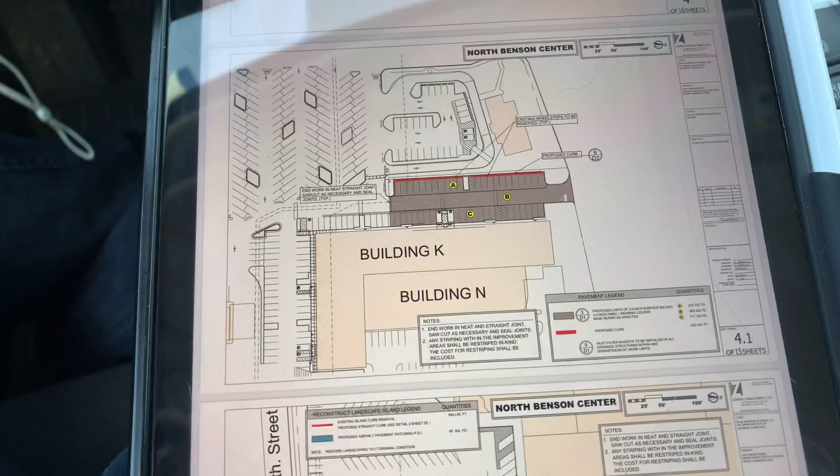This scope of work has dramatically been reduced. So you're going to have to create a revision 1 spreadsheet for asphalt and one for concrete. The striping is going to change, and that traffic curbing signage is going to change as well.

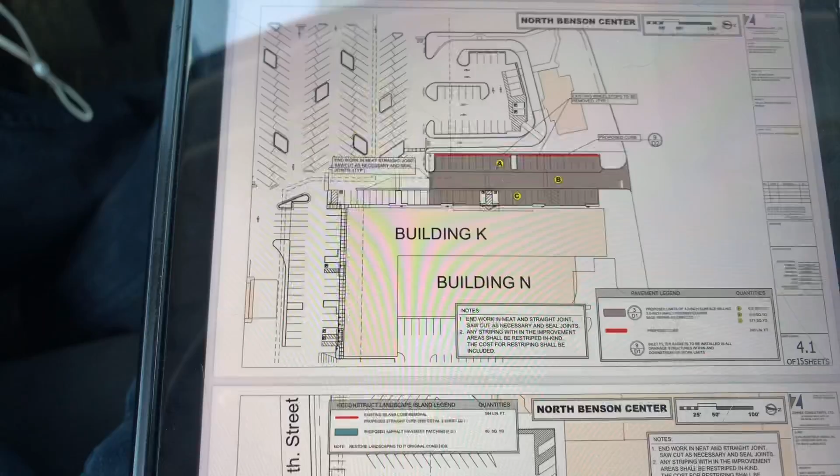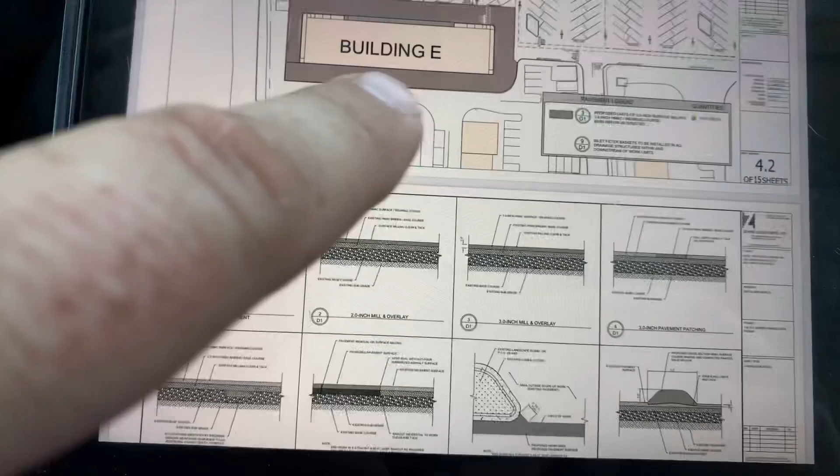All right, Jamie, so let's start off with the 3-inch milling. There's 2 different locations that I'm going to give you quantities for. One of them is at Building K, which is staying the same as before. But now instead of doing this whole area in front of Fred Meyer, we're only going to do this area right here. There's hardly any striping to have to do now because we're not striping any of this stuff back.

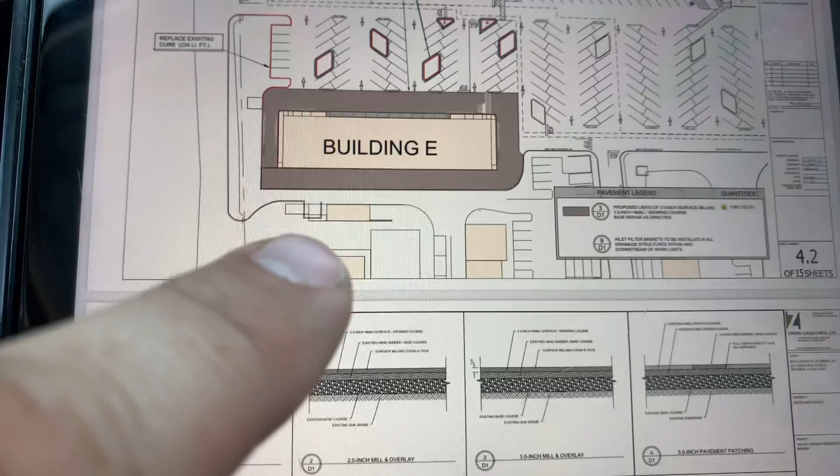We're not doing any ADAs, no ADA curb ramps, no ADA signs over here. We're just going to do around this Building E, which is Big O Tires - actually I think it's just a tire shop. So anyways, it's definitely reduced in size.

So I'm going to give you both asphalt dimensions on the 3-inch grind and overlay. We'll use our own milling machine. At Building K, we've got 17,874 square feet of 3-inch mill and overlay. And at Building E, we've got 3-inch mill and overlay, 16,479 square feet. That is the grind and overlay portion of this contract.

Now we're going to revise it to that. In the bid, they also say they want us to include 4 inches of additional dirt removal. So after doing the grinding on this job, they want us to do an additional 4 inches of dirt removal at 1,800 square feet, and then they want 4-inch placement.

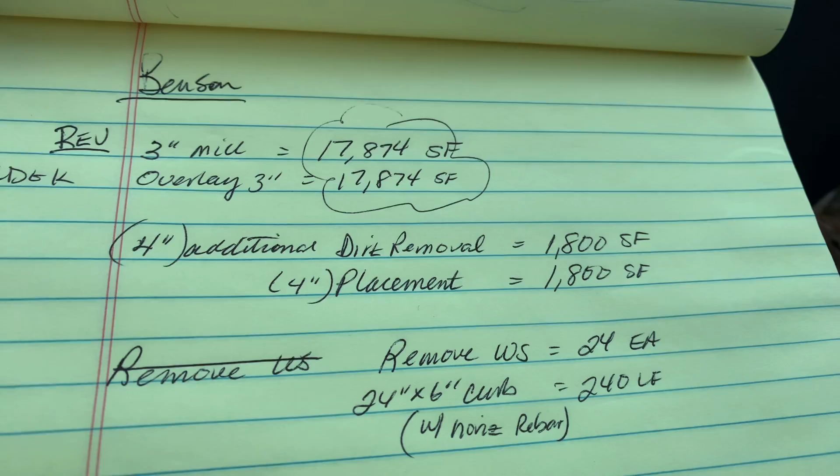They called it a binder course, so I'm assuming we're just going to be putting in regular asphalt, not crushed rock or anything. We'll be putting asphalt down. So we'll do a 4-inch layer, and then what we'll do is put the 3 inches in on top of that. Hopefully this makes sense to you.

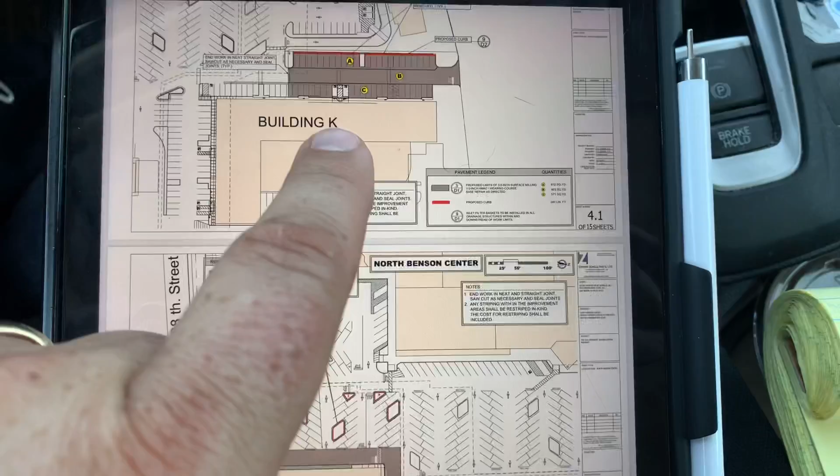I've given you the mill and overlay for these 2 buildings, Building E and Building K. But then we also need to do an additional 4-inch dirt removal and placement of asphalt at Building K.

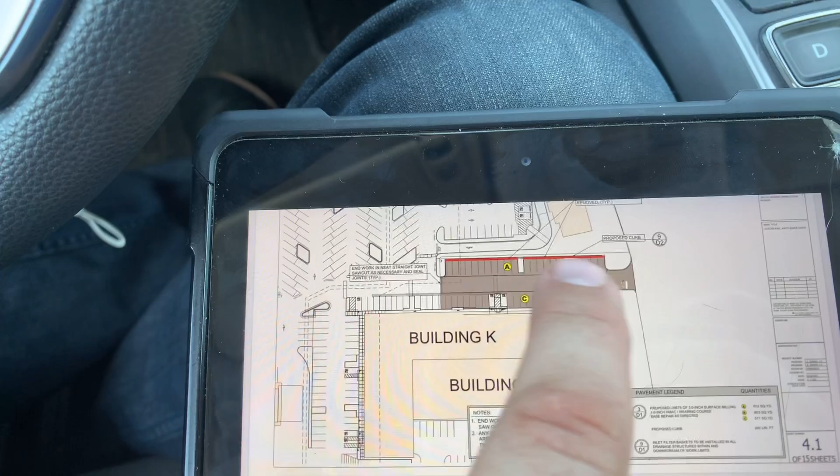Now, the other thing to add to this revision is the wheel stops. In our last bid, we did remove 24 wheel stops and then put back this 24-inch by 6-inch curb, and it has those 2 rebar sticks running horizontally through the curb, 240 feet, right here at Building K. That's where we're removing the wheel stops and putting in this huge curb right on top of the asphalt.

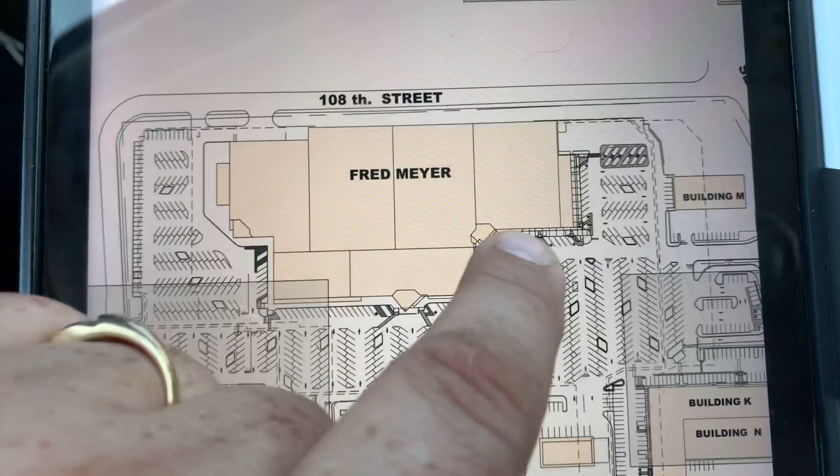Sidewalk: the sidewalk stuff in front of Fred Meyer is all gone. But if you remember, on the north end of the property, I put in to do, right down here, out on the north end by Building M, we have that 14 by 5 sidewalk and curb ramp to put in. All that stuff stays the same, Jamie. So that sidewalk portion from the previous spreadsheet stays the same - it needs to be in this bid.

Stop signs: the signage has changed dramatically now. We're not doing all those ADAs, we're not doing all those bollards. But what we are doing is 2 new stop signs on Telespar posts and sleeves, and they want the yellow powder coated. So I'd say a total price to throw in here for these stop signs is probably going to be around $350 a piece, which will cover our costs for the yellow powder coating.

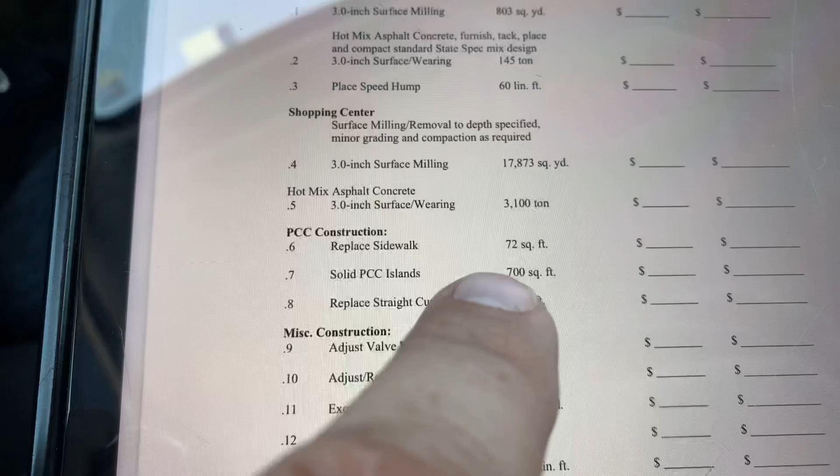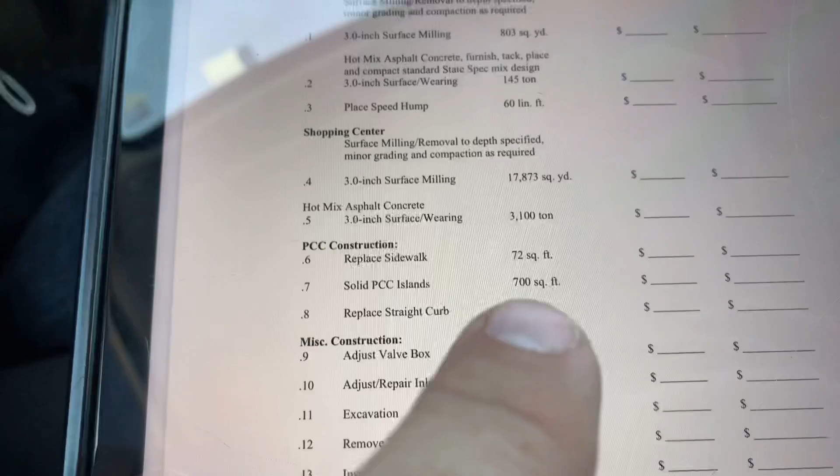Another thing, Jamie, that we need to put in is these curb islands. We have to remove the existing 6-inch curbing. It's a 6 by 8-inch curb that we have to remove, and then we have to put in this 18-inch by 6-inch poured in place curb. That's 12 inches in the ground, 6 inches above ground, and that's these islands right here.

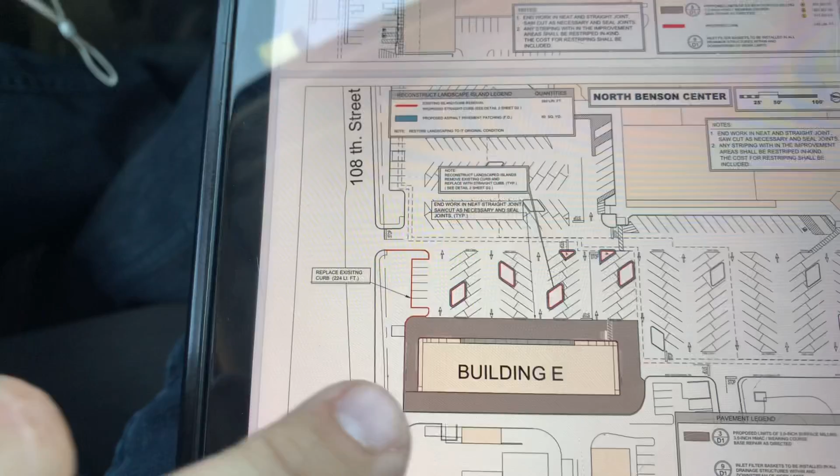Jamie, on the original bid, we had extruded curbing going in, remove and replace right here. We need to keep that in the bid. The extruded curbing that was on the original bid, we need to put that back.

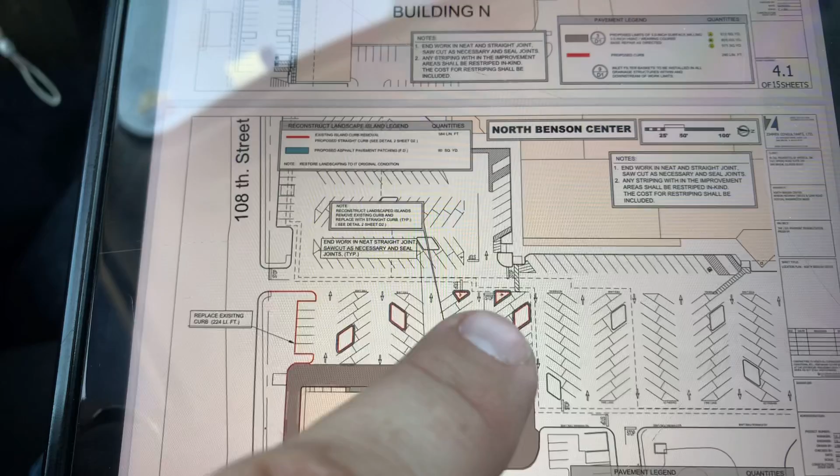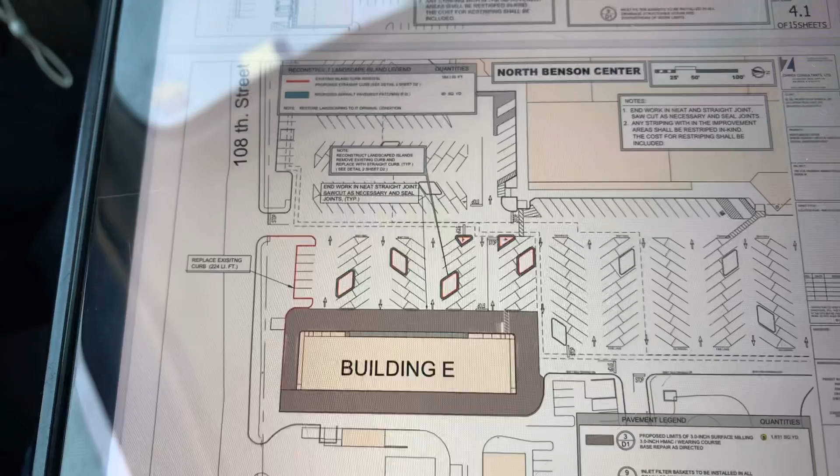Okay, so let me give you the curb removal on these islands. We have roughly 300 feet of curbing to remove out of these 6 locations of existing curb islands, and then we'll put back that 18-inch by 6-inch curb, and we'll have to do asphalt restoration around each one of those. So it'll be about 300 feet by 2 feet of asphalt restoration around these islands.

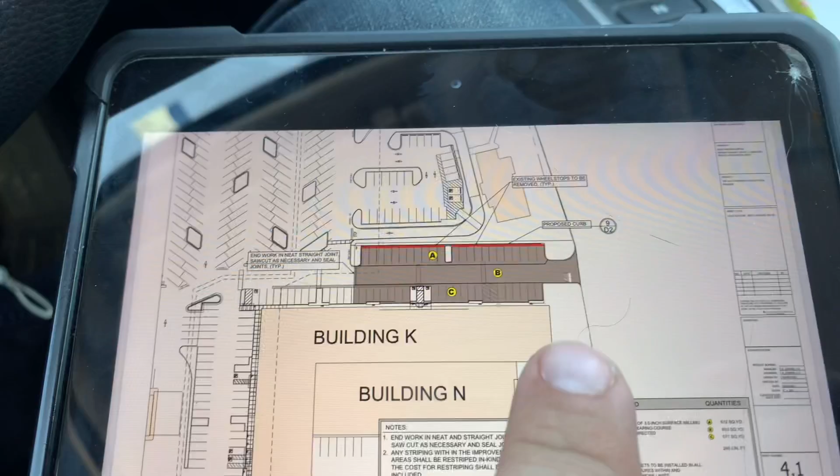As far as striping goes, we'll have 48 parking stalls to stripe, 2 ADAs, 40 feet of crosshatch, 60 feet of yellow speed bumps to paint, and then we'll have about 800 feet of red painted curb to do around building E.

So I'm at Big O Tires right now. There's Fred Meyer. All that scope got taken out. Now we're just talking about the asphalt around this building here.

Okay, I gave you that 800 feet of red curb to do. It's going to include this red striping in here, these 4-inch lines on top of that with the curbing. But we've got these 18-inch no parking fire lane stencils, and we've got 20 of those. So add 20 of these no parking fire lane stencils.

We'll have a 12-inch stop, a 12-foot length of a 12-inch stop bar down there, and 20 feet of 4-inch yellow line to do. That should be all the striping on this project.

This is part of that curbing I was talking about, the extruded curb that would get removed and replaced. It was right in here in this area. And then behind that truck, your 6x8 curb.

But this is where we're doing that asphalt grind and overlay. We got to work around this pipe here. We'll go up against the rock wall. We got a catch basin here, catch basin there, catch basin down at the far end. You can see it's like 2 passes through here.